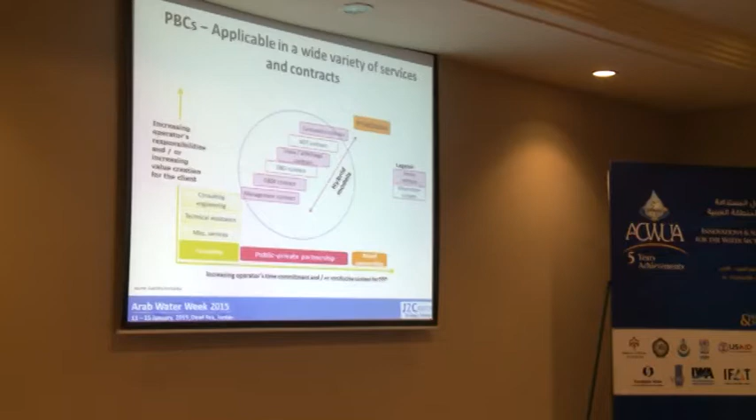Jan touched upon this yesterday for those who were in his presentation. There are a number of ways of moving forward, the utility hand in hand with the private sector, without the thinking that the utility sells assets or that water is given to the private sector. Those issues do not come into this particular solution. It's a cooperation of the private sector with the public sector in order to gain efficiencies and sustain those efficiencies.

The assets, the ownership of water, stays with the public — it's just assistance. The key feature is that we define the outputs. We know what we want, and the private sector comes in on the basis of the defined outputs to perform and get remunerated on the basis of the outcome. This is a framework which seems to be working in these situations, trying to improve the system and achieve 24/7 sustainable water supply. Thank you very much for your attention.

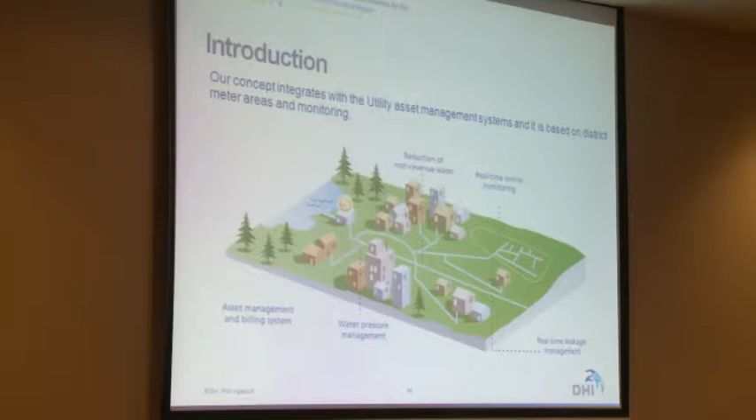Water supply involves a whole range of different infrastructure, issues, and management. We have the water distribution network, there is always a certain SCADA or telemetry system or some sort of monitoring system, and there will be a billing system of some kind. We need to work with all these different technologies that the utility has.

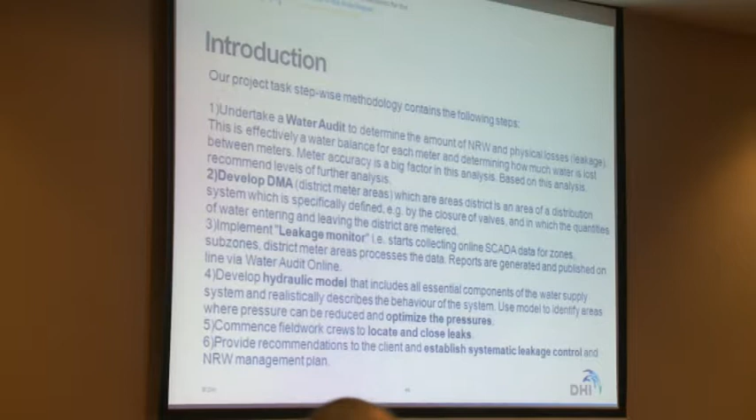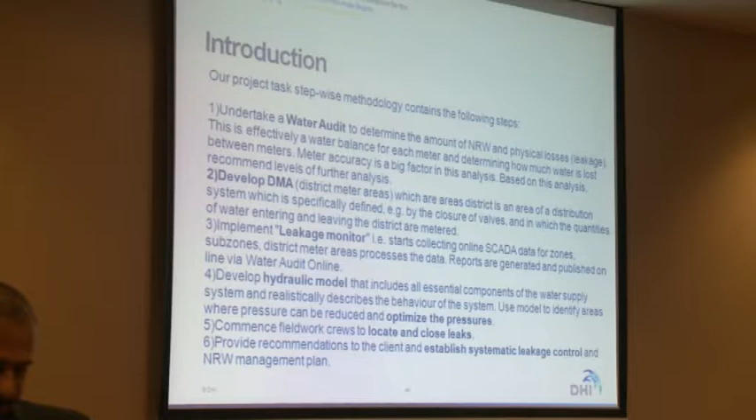These are the steps in our approach. Before we start working with the utility to reduce non-revenue water and physical losses, we help them conduct a water audit. A water audit is a baseline which helps us understand how much water is produced, how much is stored, how much is delivered, and how much is lost. Once we know these numbers and the baseline is established, we can start improving and illustrating how much improvement has been made over time. So the water audit is the first step in our approach.

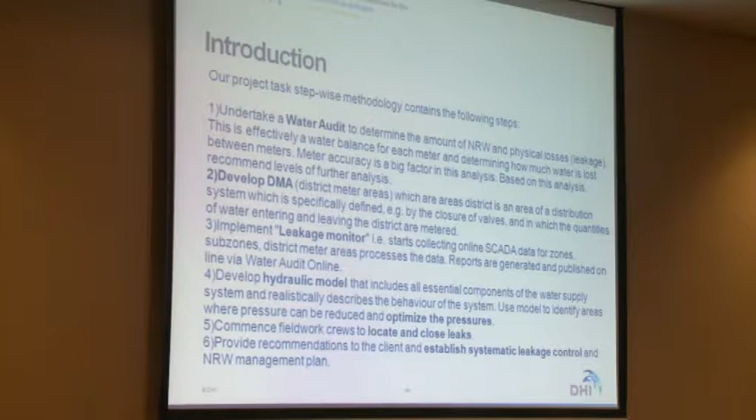Then very often we start developing DMAs, district meter areas, or monitoring districts. Why do we do that? Because when working with a utility that has never done leakage management, we might be dealing with a very large, complicated, and interconnected system. You have limited financial resources, and limited resources in terms of people and equipment. So you can't start implementing leakage management on the scale of the whole city — you need to prioritize where to start. District meter areas help you do that prioritization.

You start separating the system into separate zones, making it easier to monitor minimum night flows. Once you do that, you understand which districts lose more water than others, and you can prioritize your work. Then, to allow for easier data post-processing, we have software that helps analyze measured data and understand the minimum night flows.

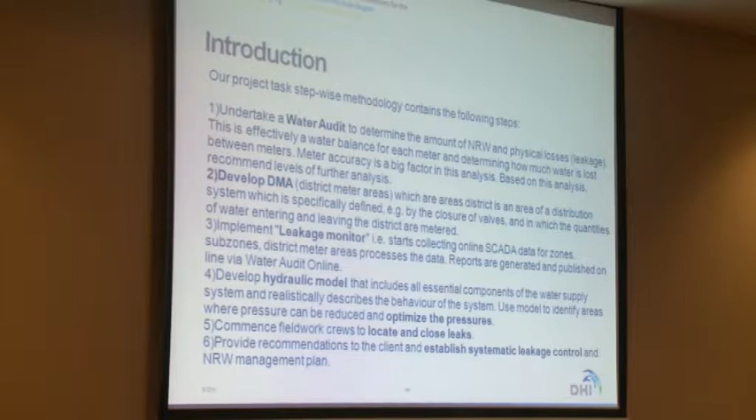We implement leakage monitor software for the utility, and we also develop a hydraulic model. Why do we do it? Because the hydraulic model first helps in separating the system into DMA zones, and later helps in pressure optimization. If you reduce the pressure by 30%, you reduce leakages by 30%, and you also reduce the potential for pipes to break.

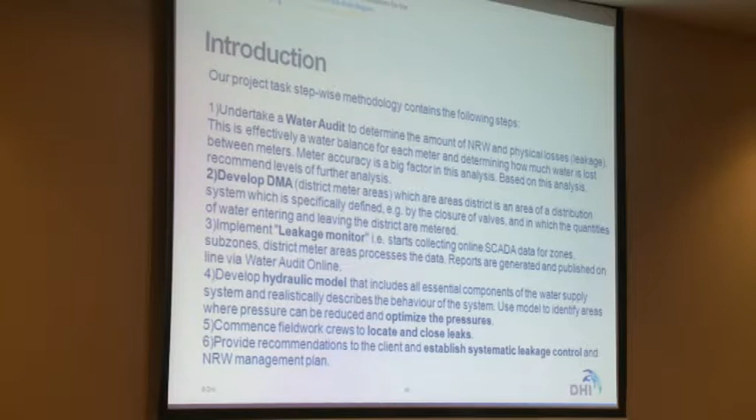And then we will indeed start commencing fieldwork, because you need to start doing physical leak detection, and then you need to start replacing pipes. So at the end of our approach, we will provide the utility with a long-term pipeline rehabilitation plan.

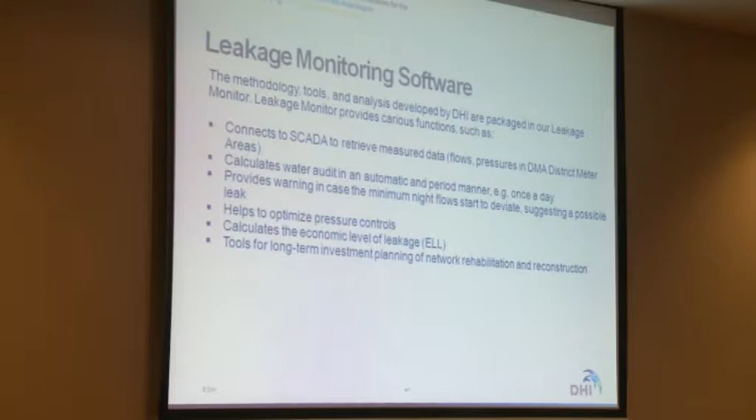The software that we use allows you to connect to SCADA data, or to different monitoring systems that you might have. It calculates water audit in an automatic manner, helps understand minimum night flows, and has a warning or automatic indication of possible leakages. I will show that. It calculates economic level of leakage, and has some other features as well. So this is the software that we have.

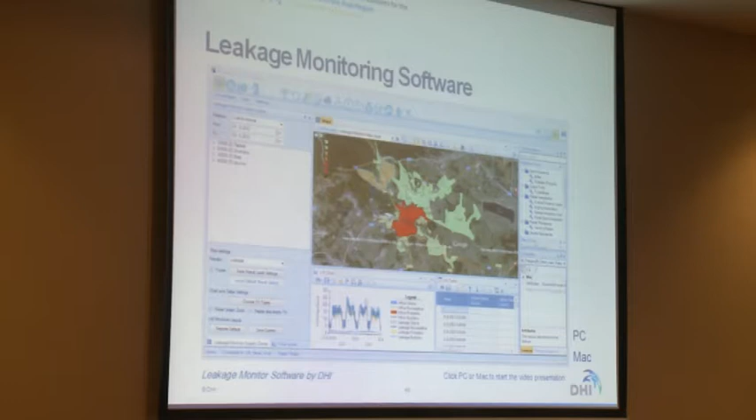As part of our approach, we compute the economic level of leakage, because you need to know what is your target. If, for instance, the current leakage or non-revenue water is 50% or 45%, and you want to reduce it, it's good to know what is the target level. Is it 20%? Is it 15%? It can be a political decision, for instance, to reduce leakages by 20% over the next 5 years, or to reduce non-revenue water to 15%.

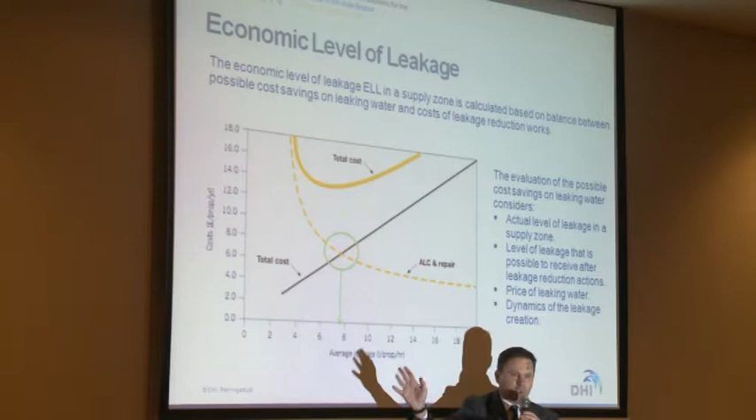But that's one thing. Another thing is when you take a look at the costs: how much it costs to produce water, how much you can invest into pipeline rehabilitation. If you put all these costs together, you get a certain percentage which is economically feasible, which is just right for what you have. So we help the utility compute and set this target.

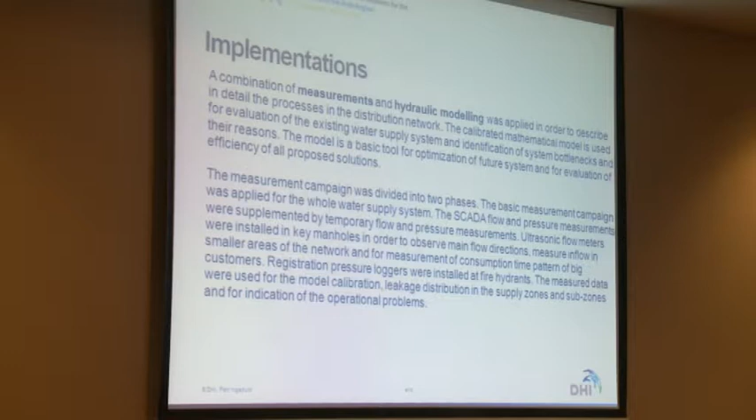As I explained, what we do is a combination of modeling and monitoring. You cannot do without monitoring indeed. You need to do physical leakage detection, and you need to start replacing pipelines.

I will be illustrating this approach with several examples, all collected from the Czech Republic for this presentation. In the Czech Republic, almost all utilities are privatized, and Veolia Water is the main water provider. DHI works with Veolia Water and provides them with our tools. We are assisting Veolia Water in the northern part of the country and also in Prague, the capital city.

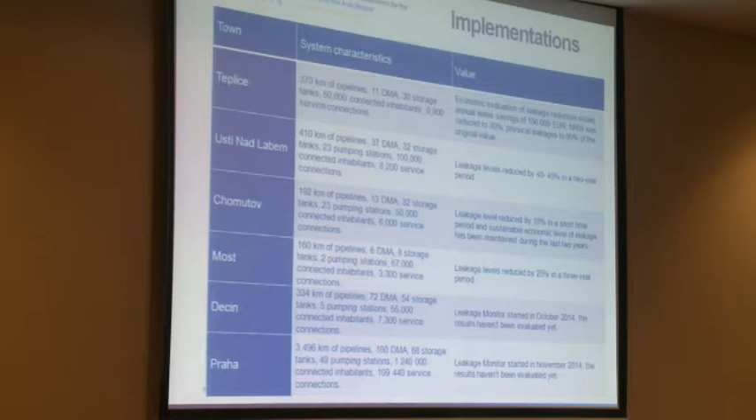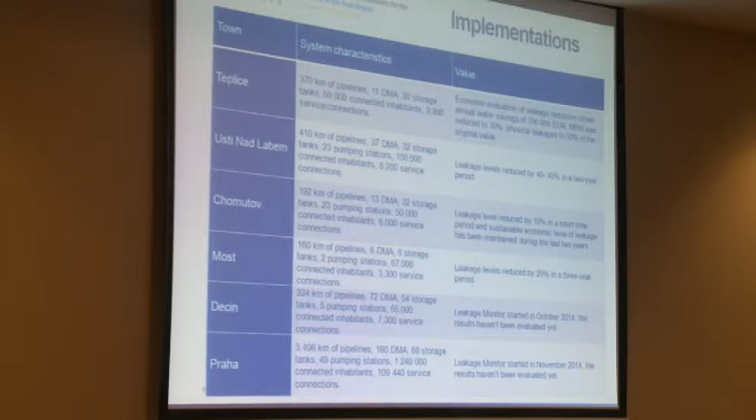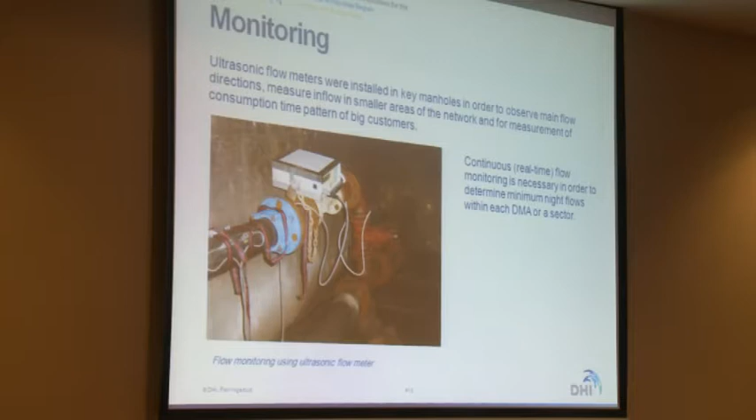Now, a couple of illustrations. This is flow monitoring, which is essential in understanding the minimum night flows. In this particular case, we installed an ultrasonic flow meter on the pipeline to continuously measure and investigate minimum night flows. So the survey is essential.

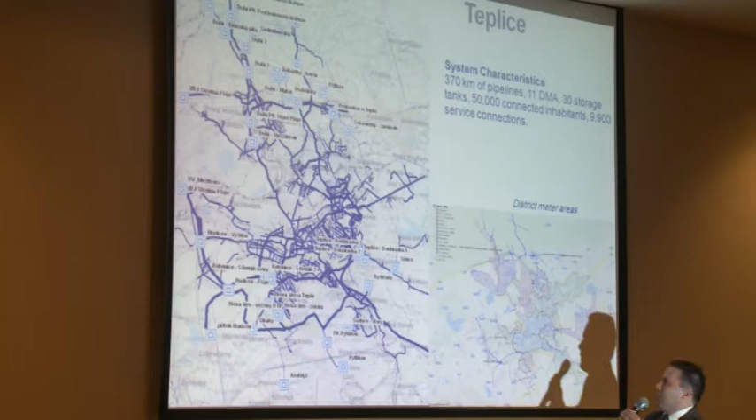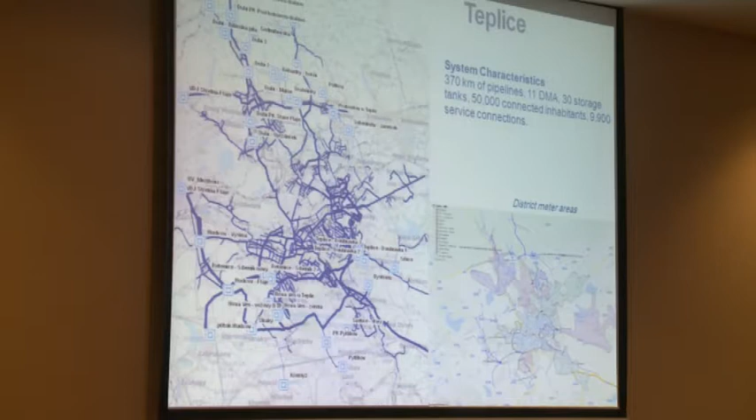Here is an example from the city of Teplice. You can see the water distribution network on the left-hand side, the pipelines. The line thickness indicates the pipeline diameter, and these are the storage facilities. On the right-hand side, you can see how the city was split into DMA areas, where each and every polygon on this screen is a DMA monitoring district.

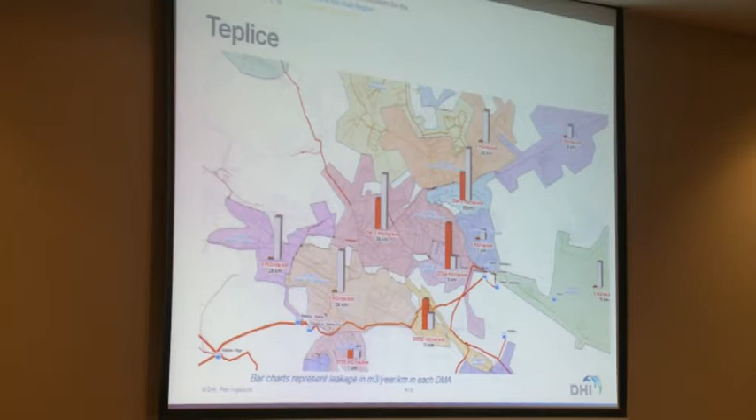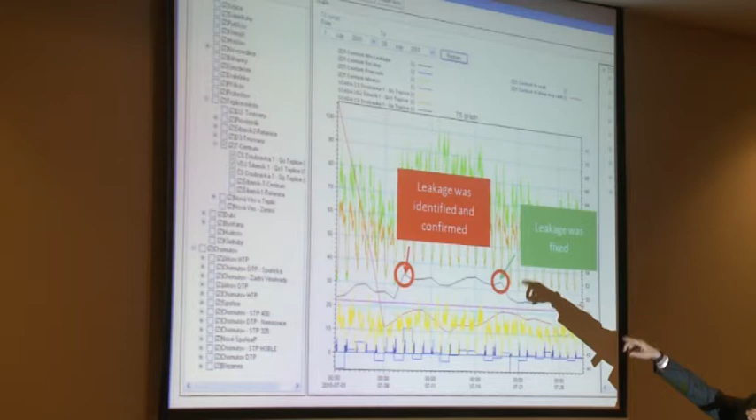Now this is another example from our software, and this illustrates the ability of the software to detect leakages in real-time mode. On the left-hand side is a list of all the different DMA areas, and if you have so many, it's really difficult to investigate each one manually.

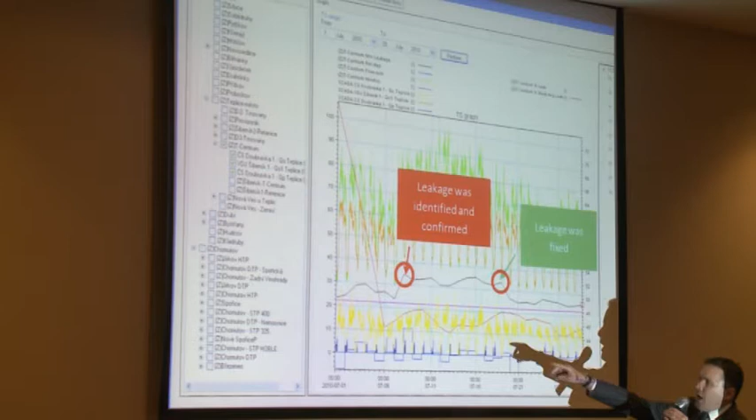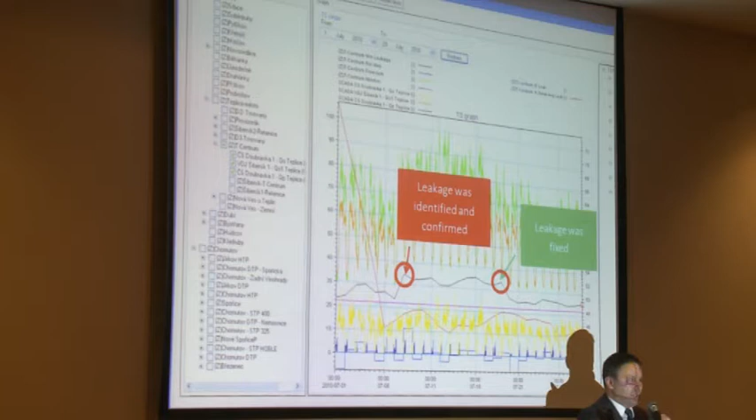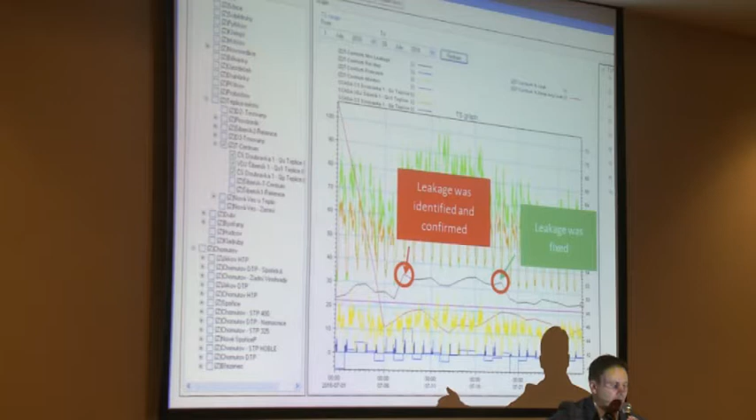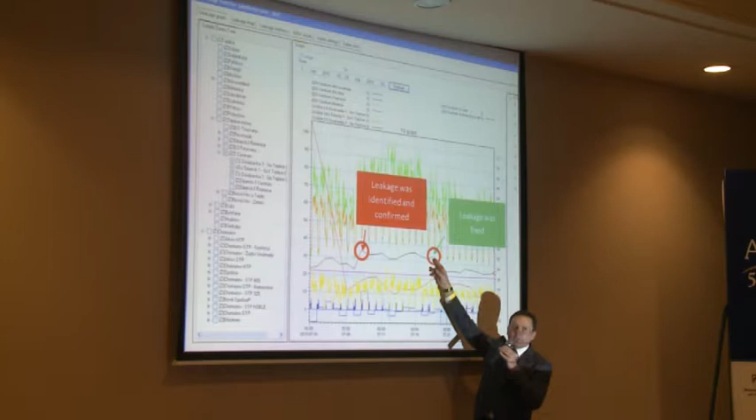So it's good if the software does it for you automatically. In this case, looking at this time series, there's a sudden increase in minimum night flow, which may indicate there's a leakage in the pipe. If this is confirmed the next day, the program generates a warning to the utility. In this case it took about a week to fix it, and after they located and fixed the pipe, the minimum night flow went back to the original value.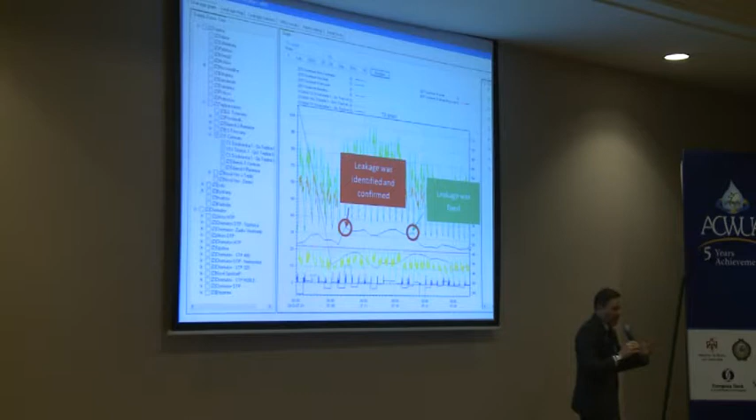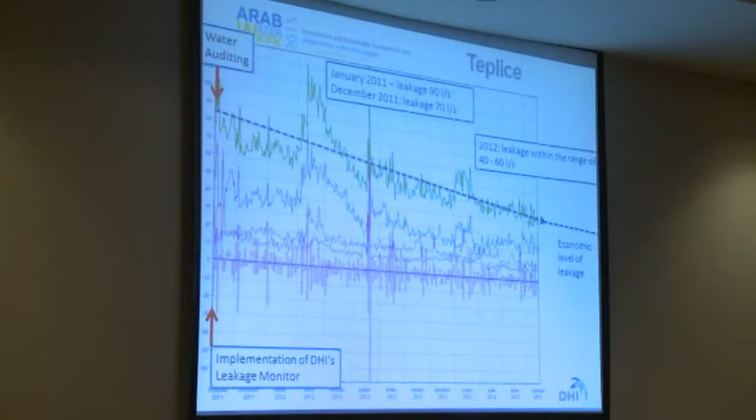So that's an example of what we do here. Here is another example, and this illustrates very well what the last speaker explained, that this is a systematic approach. You need to start doing leakage management and keep doing it. It's not something that happens overnight.

If you take a look at the green time series, this illustrates the total amount of water losses. When we started working with the utility, the average water losses were between 70 to 90 liters per second. Over time, after one year, we managed to decrease it to 40 to 60 liters per second. This illustrates that we really need to keep doing this, because if you stop the leakage management or pipeline rehabilitation at this point, the leakages will develop again.

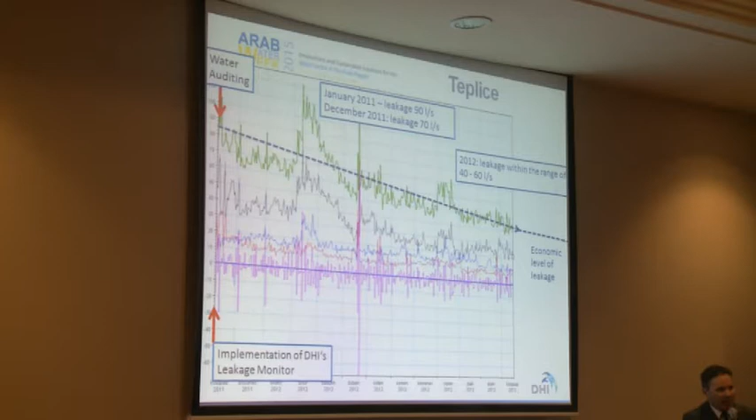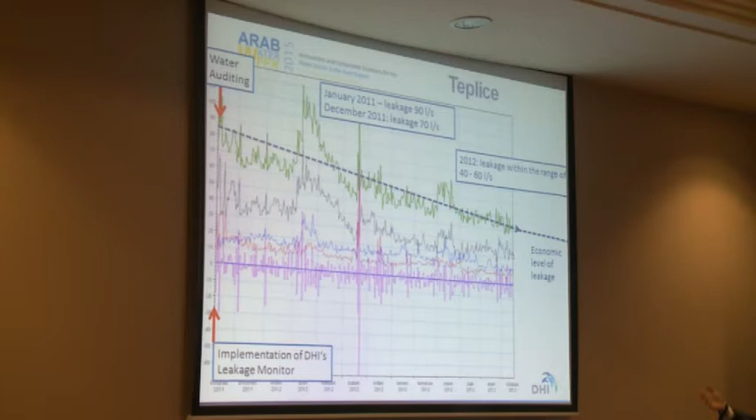There is a natural rate of leakages - every pipe will deteriorate over time and you will get leakage, so you need to keep doing this work. You can also see there's an increase in January, which is a very cold month in Europe. As freezing temperatures occur, the pipe break rate will increase.

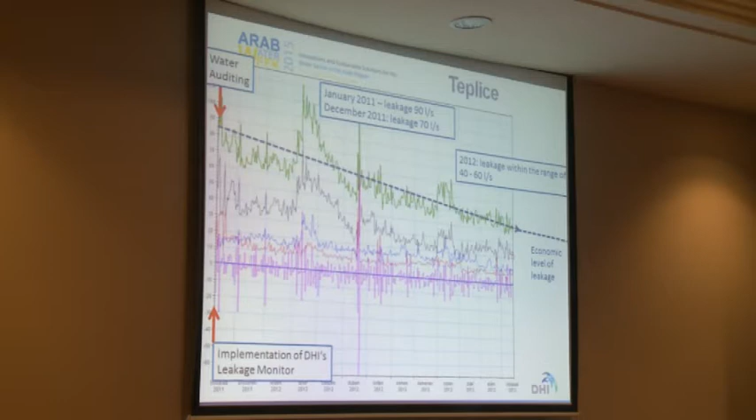Now this is an example of implementation for the city of Prague. Here we have 160 DMA district metered areas, so it's a very large and complicated system, but the whole methodology works the same way.

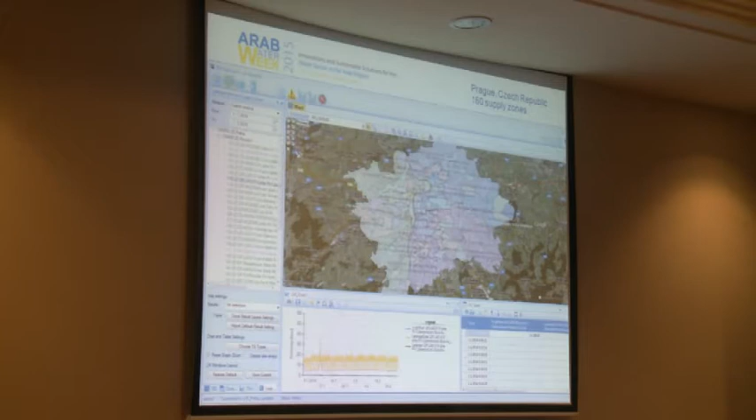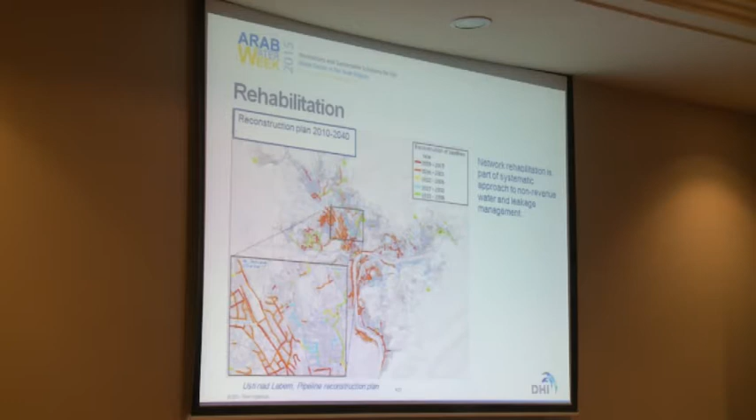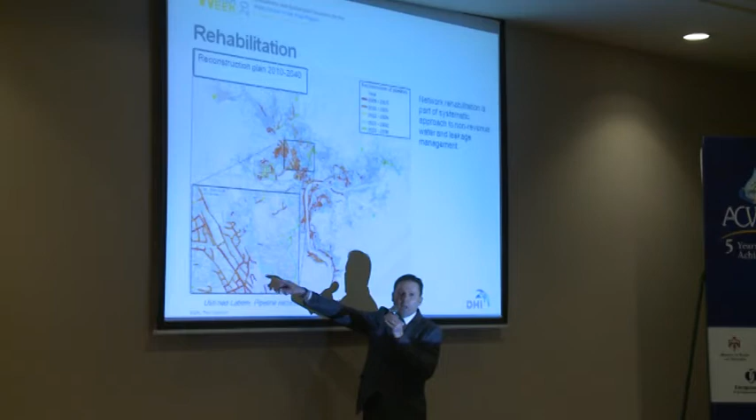Here is an example of a rehabilitation plan. This is what we produce for the utility, and it helps them understand which pipelines they need to replace and when. Each pipeline is color-coded, and the color indicates the year when the pipeline needs to be replaced. This is based on the economic level of leakage, how much money they have, how much it costs to produce water, and all these economical aspects.

So the conclusion here is that in our experience, this approach works very well. You need to understand it's a long-term approach, a long-term investment. In our experience, it was always possible to reduce leakages by at least 20 to 30 percent from the original value after we started working with the utility. So that's my conclusion, and I thank you very much for your attention.

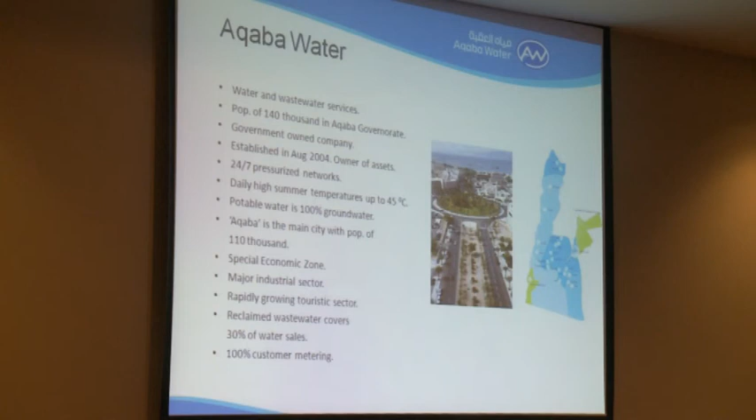So just a brief about Aqaba Water: we have about 140,000 people in the south of Jordan, and mainly the supply is continuous. So why were we excellent in 2010, and why do we now think we need to do more? We did most of the basic work starting as a public utility in Jordan with very little to start with, and started dabbling with leak detection. We had a huge replacement of pipes, of tertiary pipes.